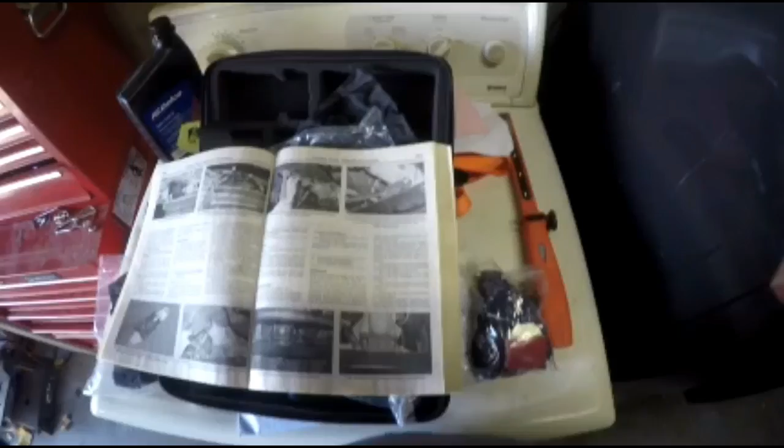This is a video of the Silverado transmission removal, and we're going to start the video. This is to remove a transmission on a 2005 Silverado, which you can actually do 2003 to 2007, depending on the 2007 model.

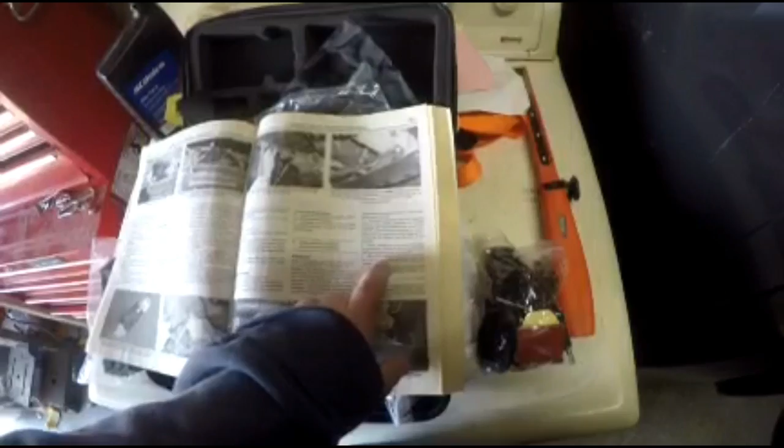Alright, so first thing it says is to disconnect the negative battery cable. And then it says to raise the vehicle and support it on jackstands. And then it says to remove the transmission oil pan plug and drain the transmission fluid. Alright, so right now we're just going to disconnect the battery.

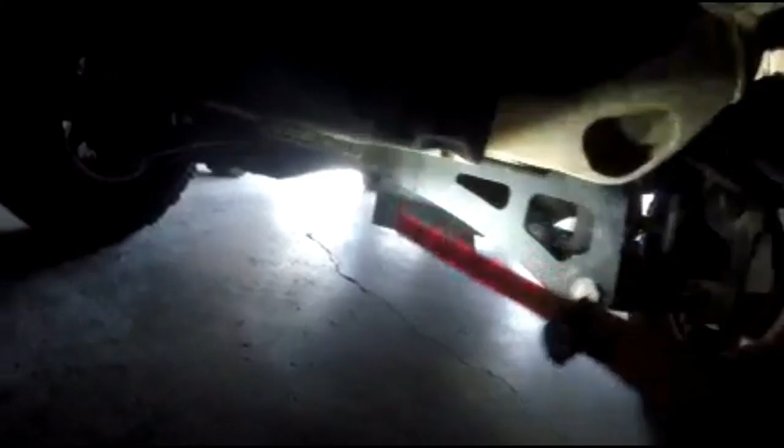Alright, so it says to raise the vehicle securely on jackstands. My truck has a 6-inch lift, so I don't need to put it on any jacks. But when you do jack it up, if you just have a regular truck, let me get a light. I'm gonna edit this anyway. So I would say jack it up right here, and then you can put your jacks on your frame back there. Okay, but like I said, I don't need to jack it up.

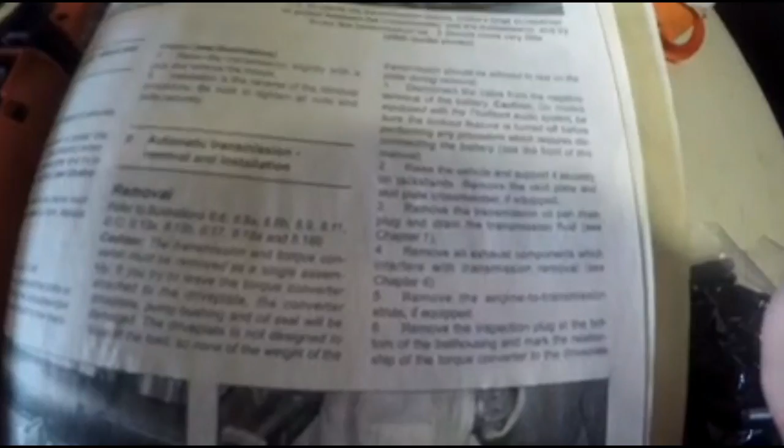So next it says to drain the transmission, which you don't need to do right now, so I'm not going to do that right now. But if your transmission doesn't have a plug for you to drain your oil, you're going to have to take all the bolts off, and that sucks because oil gets all over the place. Transmission oil freaking stinks. So you're gonna have to have a pretty big drain pan and some rags. I'm gonna do that probably towards the end, because I have the plug there, so pretty easy.

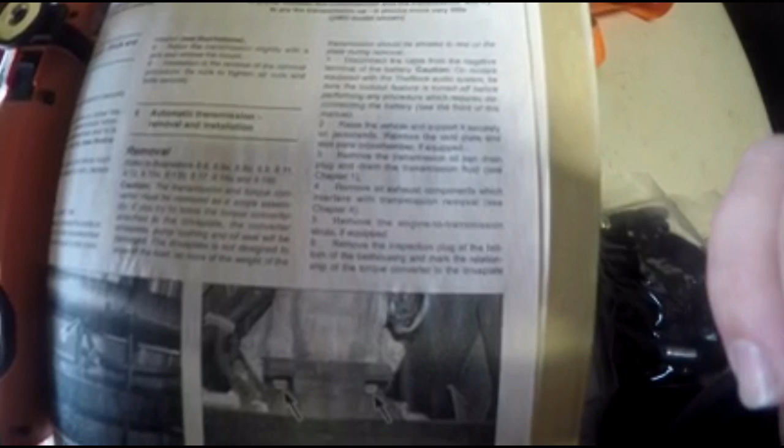Remove all exhaust components. So you're basically not taking off the header. You're taking off the Y pipe that connects to the exhaust manifold, because that's in the way of the transmission. So yep, that's what we're gonna do right now. You gotta spray the Y pipes with a rust penetrant. Where did I put it at? The WD-40. They make a good rust penetrant.

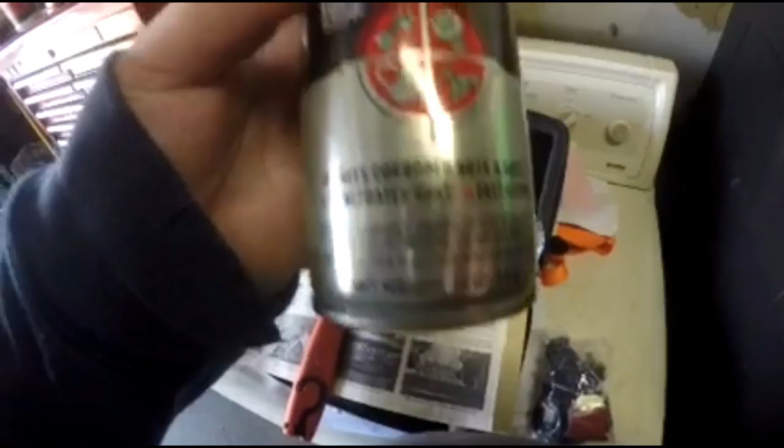So to spray the Y pipe, I'm going to use this WD-40 rust release spray. It's like $7.99 I think. But it works wonders on releasing rust. It kind of breaks down the molecular structure of rust, so it breaks off easier. If you don't have access to WD-40 rust release, you can use any type of WD-40, but it's going to take longer.

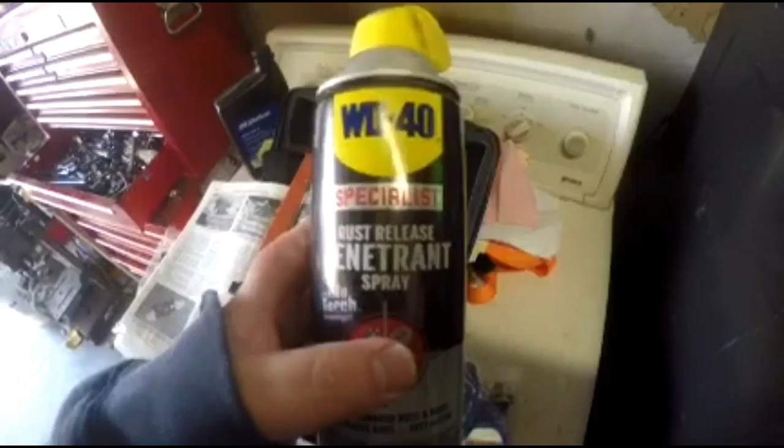I'm just going to spray it on there, let it sit for 10 minutes, and then bust them loose and see if they pop. If they don't, then I'll spray it a little bit more. It might need 20-30 minutes. But if you just use regular WD-40, I would spray it and give it a day, and keep spraying it throughout the day. Get a good soak on it. I did break an extension on my last video, so right now I'm going to go down there and spray the Y pipe bolts.

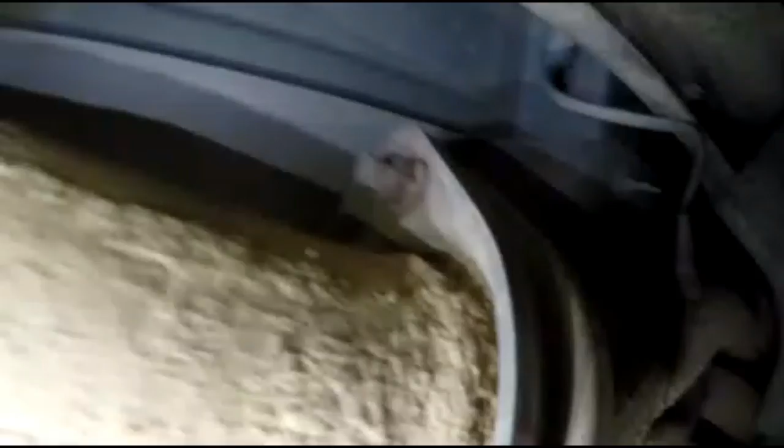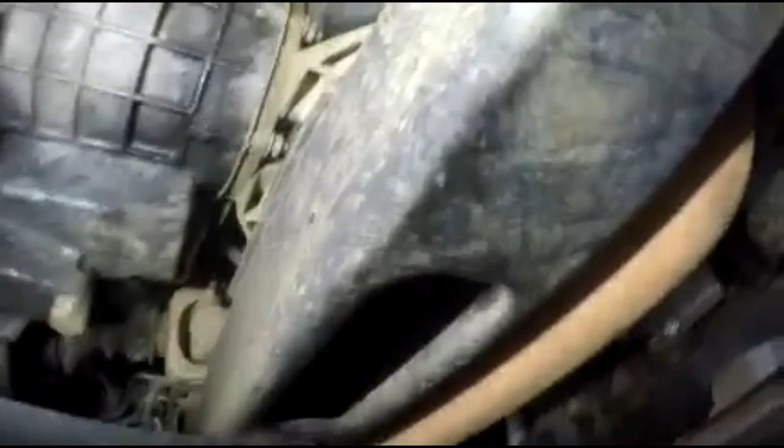Spray these too. There's just two here, but there's mud and gunk and all that stuff. Looks like I got a little rear main seal leak there. I'm gonna buy all new anyway, so fix that. This one looks like it has a lot more clearance than my other 2004 Silverado. Okay, so I'm gonna spray those, and I'll get back to you. So I sprayed it down with some WD.

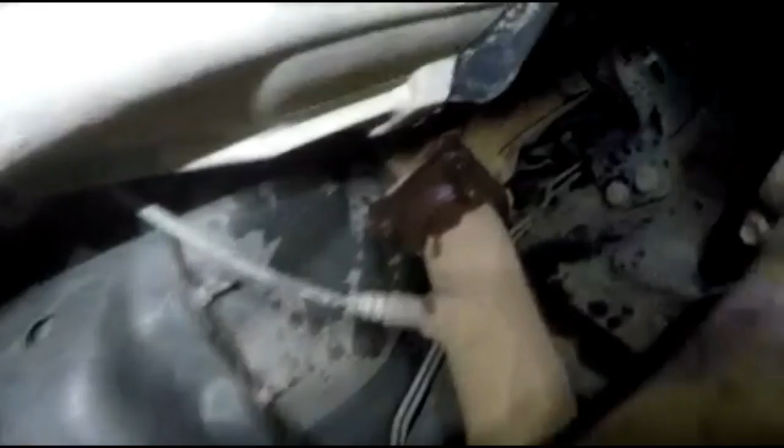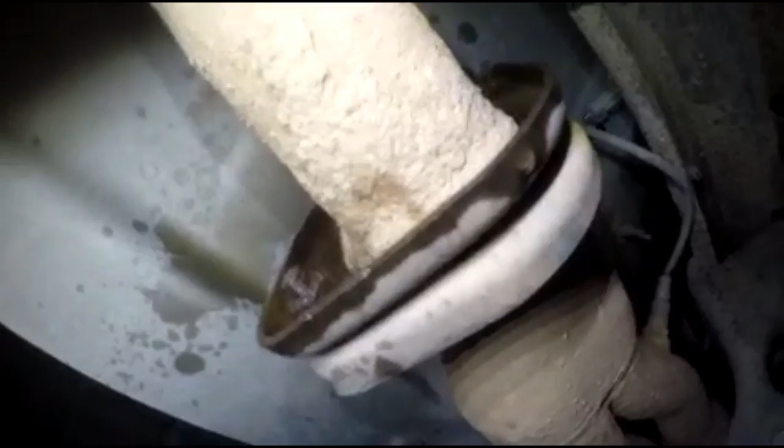They're pretty crappy towels, and then I sprayed this one here and there. So I'm just gonna let it soak up a little bit, and I might crack these ones first. It should just come off easy. I live in California, so there's not much salt on the ground, but depending, some people said, oh, I use the heat torch to torch them off there. You don't need that. You just wire brush, soak it in some WD, crank that thing off there. Should be good to go.

Alright, so I'll let that sit, and I'm gonna have to have a handy towel too for the crap that gets on the ground. My ex left that in my house, so it came in handy pretty good.

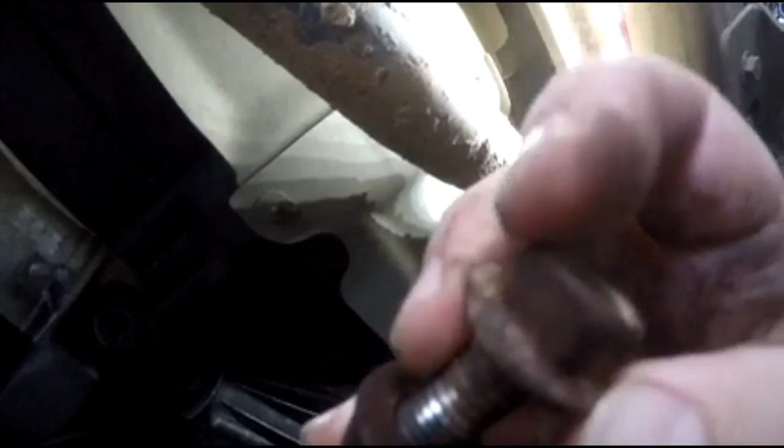Alright, so I gave it 10 minutes. It busted loose pretty easily. On the passenger side, the bolt is fixed on there, on the muffler, so it shouldn't spin. On the driver's side part, this is what it looks like. So I had to put a socket here, and I wrenched off this part, but it came off a little bit before I had to put the two sockets on there.

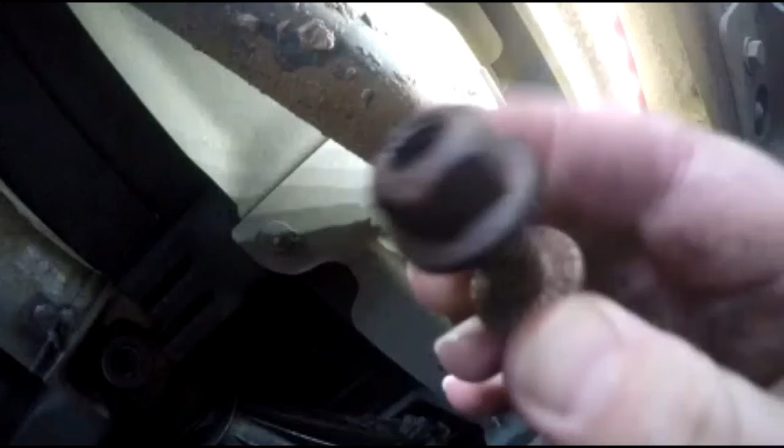Alright, so 15 millimeter, the bolt that's sticking out that way that you first see, 15 millimeter, 14 millimeter, 3/8 drive, and also on the other side it's 15 millimeter. So this one that spins, once you already break it loose, this one here is a 14 millimeter. This is on the rear part of the Y-pipe. Now I'm going to start doing the front Y-pipe on both sides.

As you can see, there's a lot of dirt here, so I'd recommend wearing some type of goggles to keep this crap out of your eye, because if you get rust in your eye, God forbid, it won't be good. I recommend wearing goggles, and I just started, so I'm not wearing gloves yet, but I do have mechanic gloves, so I'll put those on later. I don't got my goggles on, but I'm gonna put them on right now.

Okay, front pipe now. You're gonna need an extension and a swivel head, and I'll film that. I'll show you guys.

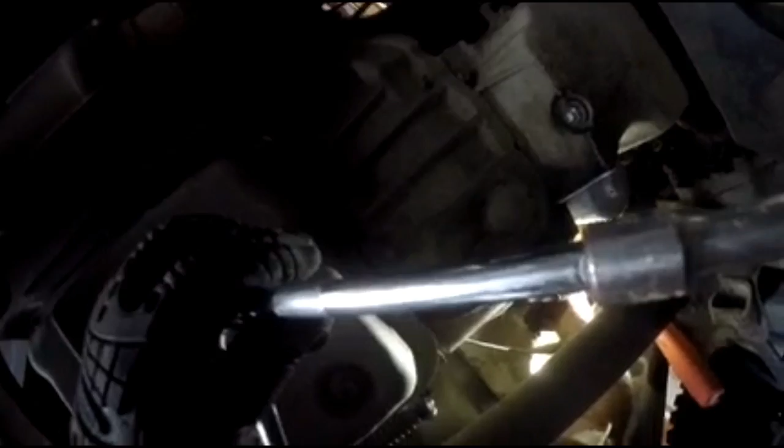I busted off the Y-pipe bolts already. This is what I use. I think that's like a foot extension right there. I got two 6-inch extensions. Might be a little bit longer, but this works pretty good. And a 15 millimeter extended socket and a swivel head, and I sprayed it with the WD-40. I let it sit for 10 minutes, and they busted loose really easily, barely any effort. It was like they were already loose. All 6 of them are loose now.

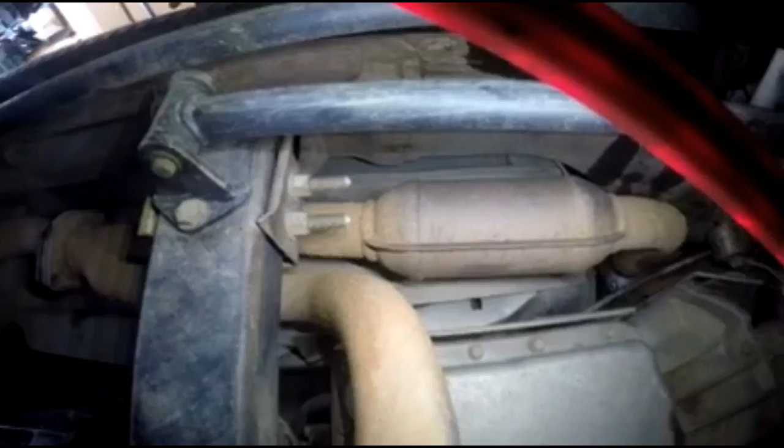So now I gotta trace back these O2 sensor wires. They should be up in the frame here. I think there's only 2 on this one. No, there's 3. Might be another one hiding somewhere. My other truck, there was 4. This one has 3. So I'm gonna find where the wires are connected to the frame back there, and as soon as I find them, I'll get it on video for you guys.

So, after you crank off your Y-pipe bolts, don't take them off all the way, just loosen them. And then you're going to have to disconnect your O2 sensor plugs. You do not have to unscrew them off of the Y-pipe, just their little connectors. I'm going to find them and then I'll get back.

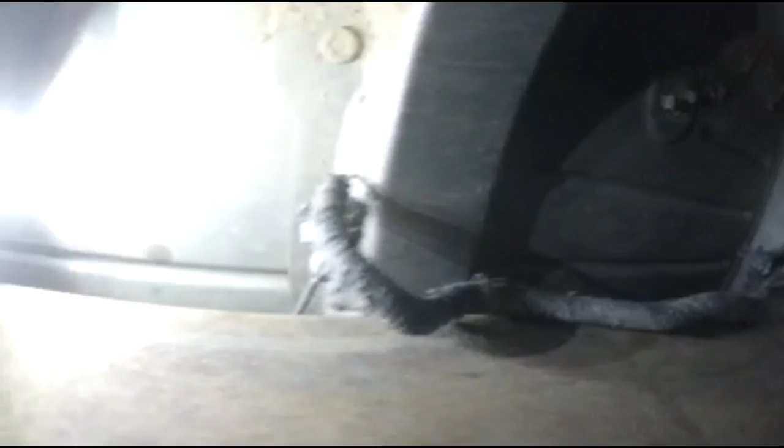Alright, so here's one of the plugs. That's what it looks like. It's just clipped onto the frame, just like there. So I'm going to try to take it off with me holding the camera. You just pull it off of the frame gently. You don't want to break anything.

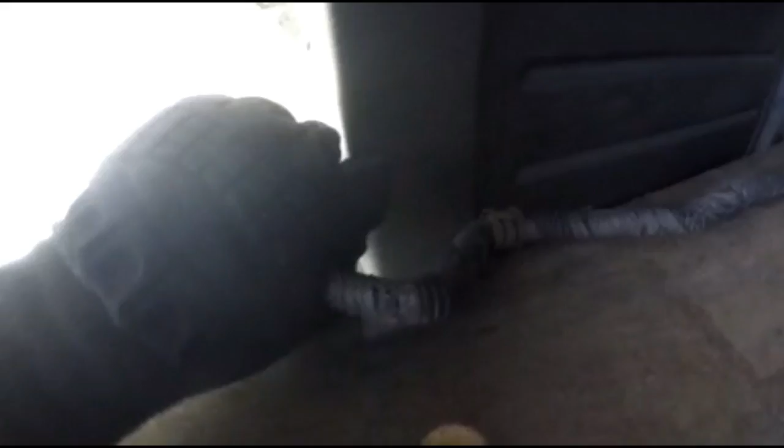Stubborn. Damn. It's really on. Alright, I'm gonna get back. I'm just gonna use my hands to take that off, but get back here. Okay, so like I said, I just pulled it off of the frame.

Alright, so next thing you do, you see this blue thing right here? Blue thing comes off there. You lift this tab up right here, tab up, and then you pull apart. That's it. Now I gotta find 2 more, and there's the other one right there. So now I just gotta find 1 more, and then I can drop it.

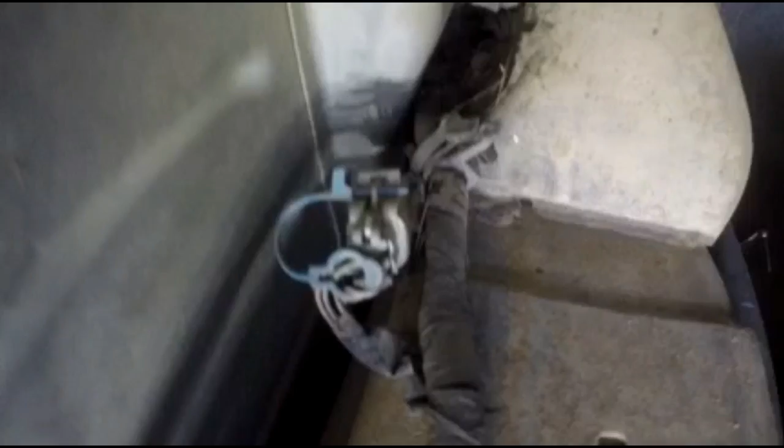The other one looks like it's up in the transmission, like on top of the transmission. So I might not be able to drop the Y-pipe, but anyways, I'll get back to you and show you where the last one is. This is on the passenger side. 1 there, 1 there, and then on the other side I gotta find out on the driver's side where it is.

Okay, so here we are now on the driver's side, towards the rear end. There is the other. So there is 4. There's 4 O2 sensors. There's the other O2 sensor there. Same thing. You just pull that little blue tab and then unsnap them. They're pretty easy to pull apart. So don't pull on the wires.

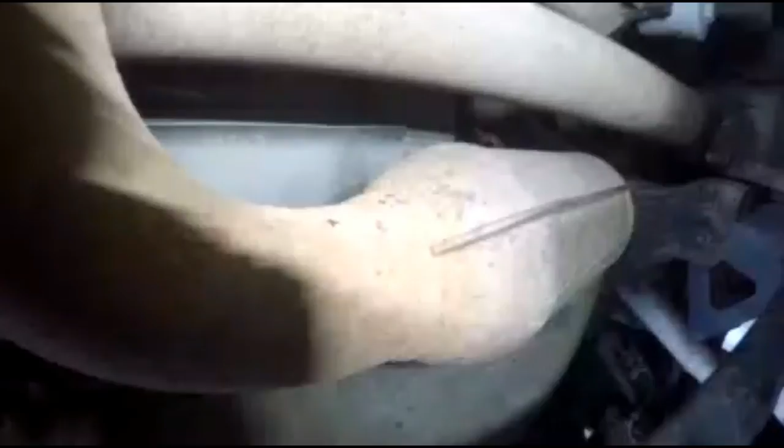And then there's the other O2 sensor there, which I don't know. The wire is going up top into the transmission up there. So this is on the driver's side. So there is 4. The reason why there's so many is because Silverado made them for the exhaust when you first start your truck up. This works for the... so when it's warming up, you're not discharging too much unburnt fuel into the atmosphere. So that's what the 4 is for.

And then the other 2 work when it's already heated up, and then the other O2 sensors start working. Alright, so I'm gonna pull out the other 2 on the driver's side now. Alright, so I found the last one. It looked like somebody worked on this prior to me getting to it because it's already disconnected. Or, the blue tab is already out of it. So it looked like it wasn't connected to something up top.

This one is the closest one to the exhaust manifold on the driver's side. I didn't pull this off already. It was already pulled off. So, but it does have a tab on there. It looked like it was connected to some part of the transmission here on the side.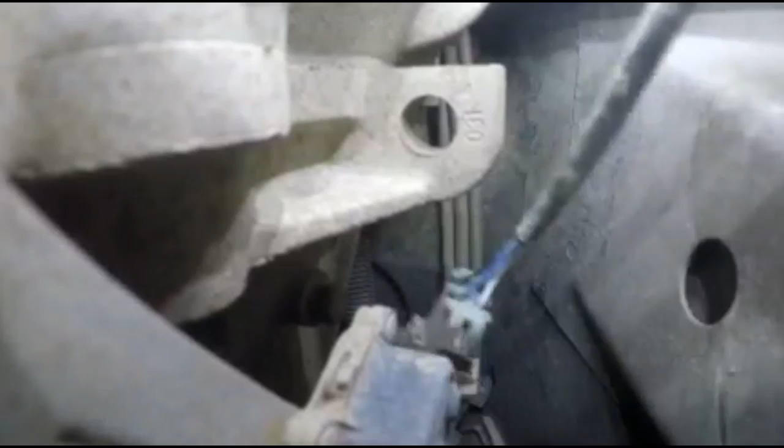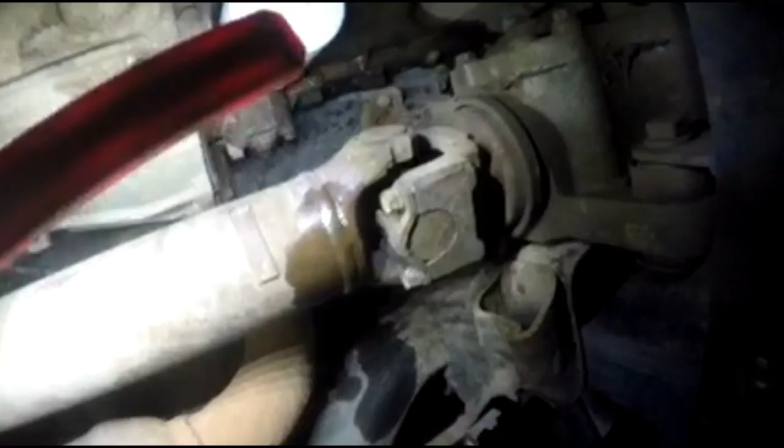So, if you are having trouble getting to this particular one here, you might end up having to skip a couple of parts and take off the four-wheel drive line here, and maybe a couple other components to actually get to it. But I'm pretty sure if you took off this drive line for the 4x4, then it should be easier to get to.

Alright, and if you are ready to take off the drive line, see, this has a plug here. That's the transmission plug. On my other truck, it didn't have one of these. I ended up having to take all of these transmission bolts off, which sucked, and crap got everywhere. It sucked so bad. And you can't get the actual pan off there because this thing is in the way. The shifter cable is in the way here, and the shifter cable bracket was in the way.

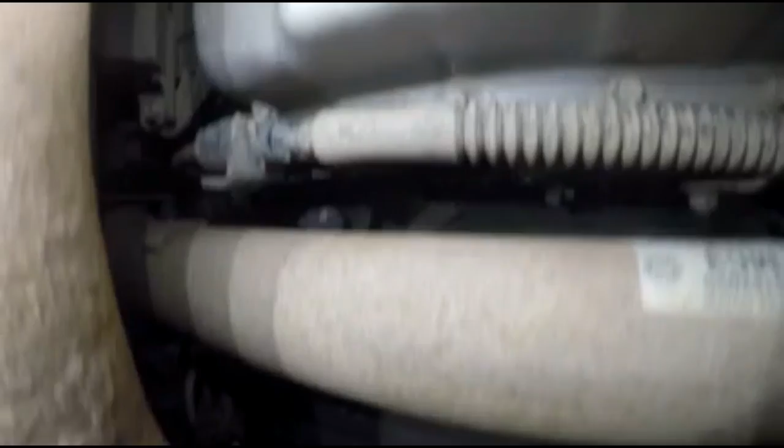So I don't even think I ever took this off because that bracket is bolted on to the top. So if you don't have one of these plugs, you're gonna have to undo all of these here and drain it that way. It's the only way to do it. Okay.

So I can unplug this now because it's already disconnected. I can get to it. Just pull the blue tab and then lift up the gray connector and pop it out of there. That's what I'm gonna do right now.

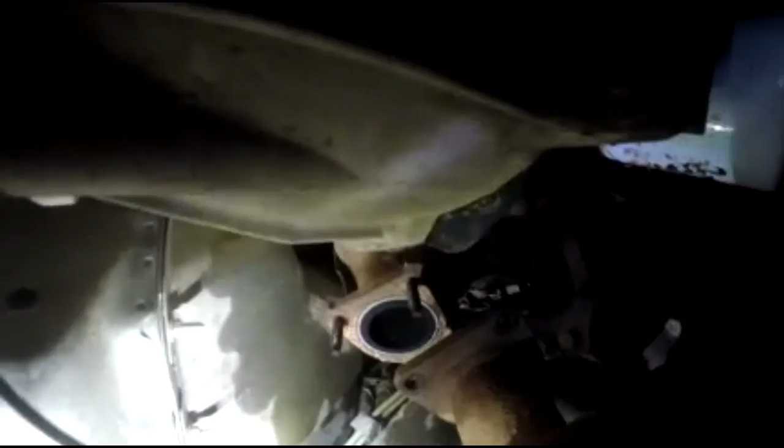The last O2 sensor was already disconnected from the fitting. It wasn't disconnected from the actual sensor, it was just the fitting. I ended up just loosening up the driver's side of the Y pipe, and I left the passenger side still bolted on there. I unbolted the driver's side and dropped the Y pipe a little bit.

Now I have full access to grabbing it, and even if it were connected onto the tab up there, you've got full clearance for your arm to get in there to disconnect the last O2 sensor. All the other ones were easy except for this one.

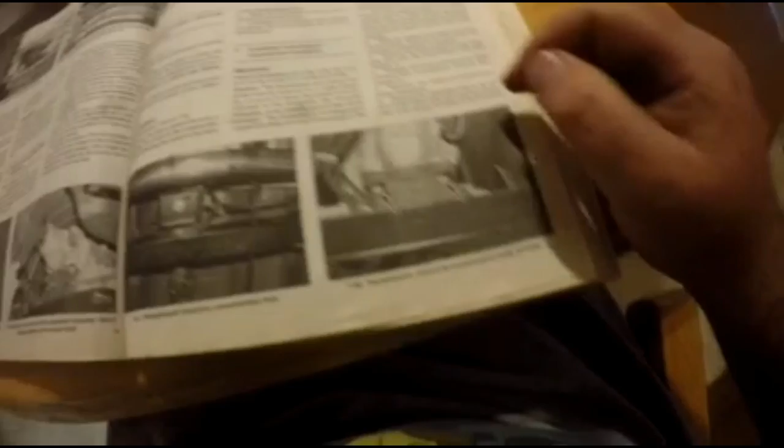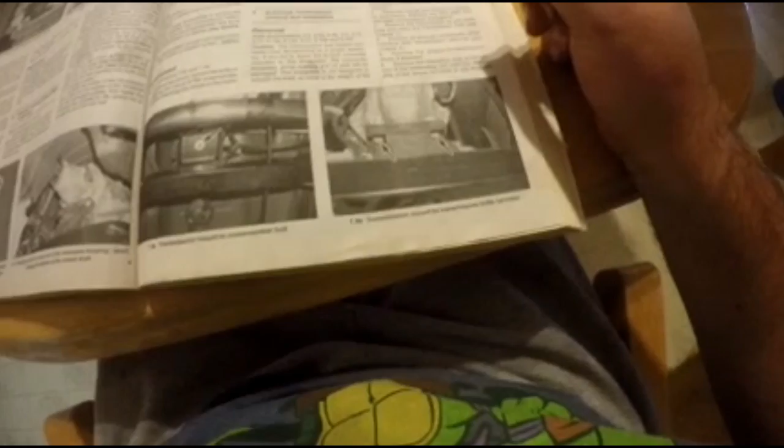Alright, so I'm taking a little break from the job right now, but after you remove the Y pipe, it's going to say to remove the transmission struts if equipped. I don't know why it wants you to remove the struts so early, so I'm just going to leave that on there until I've got my transfer case off. Maybe it's for if you have a 4x4 or not, I'm not sure, but I'm not going to remove the strut transmission mount yet.

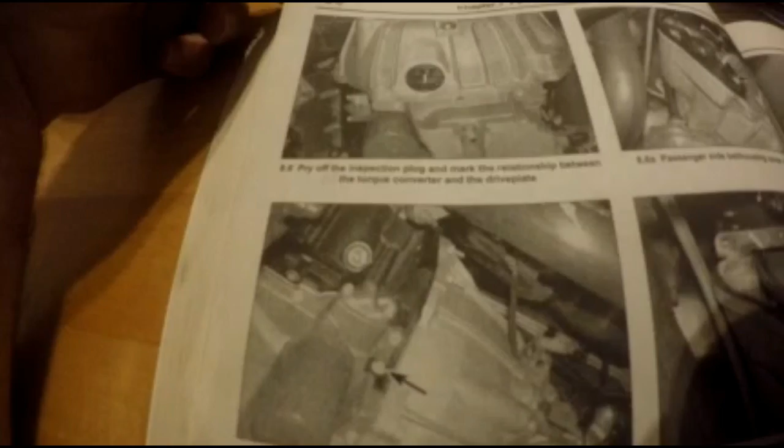So it says now to remove the inspection plug at the bottom of the bell housing and mark the relationship with the torque converter. I'm getting a new torque converter, so I'm not worried about that. But if you are putting your same torque converter on there, which I don't see why you would if your transmission's blown up. If your transmission's blown out, you're gonna have to get a new torque converter anyways, because all of the metal that broke off when the transmission broke just shot right into your torque converter. So you're gonna have to get a new one anyways.

But you just mark one of the bolt holes to the flywheel, so to the drive plate. So you just do that. I'm gonna take a little break and then I'm gonna get back at it.

I couldn't get the Y pipe out all the way because I've got a lift kit on my truck, so there's a couple of things that are stopping it. I guess I'll show it to you guys, but it should just come right out. My lift's extra added support brackets are stopping it from coming out, so I had to take a couple torsion bars out, but it still doesn't come out. So I'm gonna have to wait till I take the cross member out, and then it should come out completely. But I have enough room to do the majority of the stuff, so it should be alright.

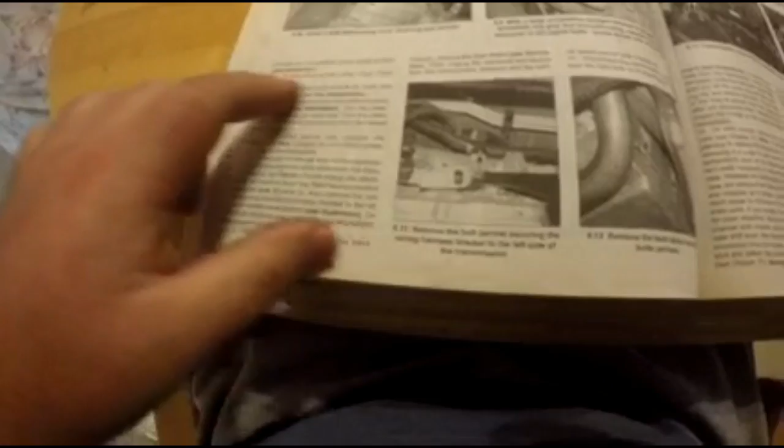So next, remove the starter, and that's what I'm going to be doing next. And don't forget your Ziploc bags. You're going to need some Ziploc baggies to mark all the parts, the nuts anyways. These are just clear ones. You can get the ones that you can actually write on, but Ziploc bags will come in handy in the end.

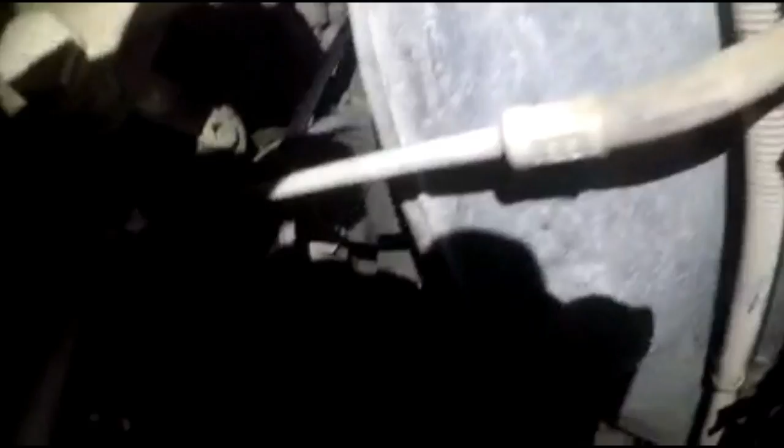Alright, now I'm taking off the torque converter. You need a 24mm socket to attach on the front crankshaft pulley bolt. A deep socket would work better, and it would also work better if you had a friend help you out. When you crank the crankshaft pulley, you want to turn it clockwise, facing the front of the truck, and you're going to have a friend help you.

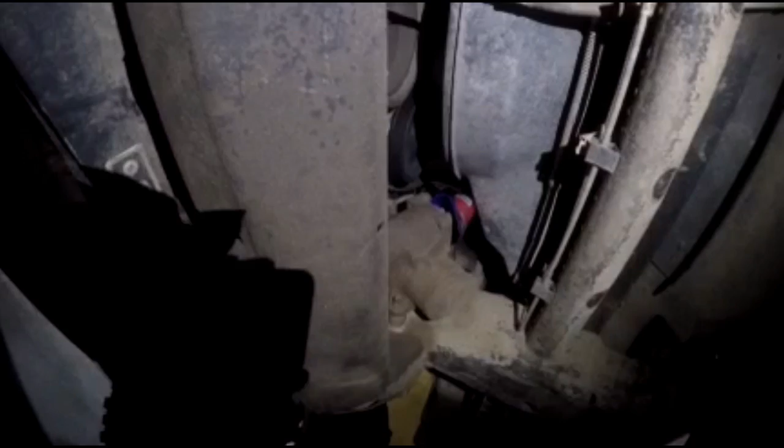He's going to have a 24mm socket on a half-inch drive, torque wrench or something, because when you're taking off the torque converter bolts back there, it's gonna want to move the crankshaft pulley, so he's gonna have to hold it tight. And I'm pretty sure there's Loctite on there from the factory, so I'm thinking somewhere around 120 pounds, possibly. So any way that he can hold it. I had a girl help me last time. Alright, gonna take that off.

I'm gonna call my friend. He's gonna help me out, and maybe I might make a video.

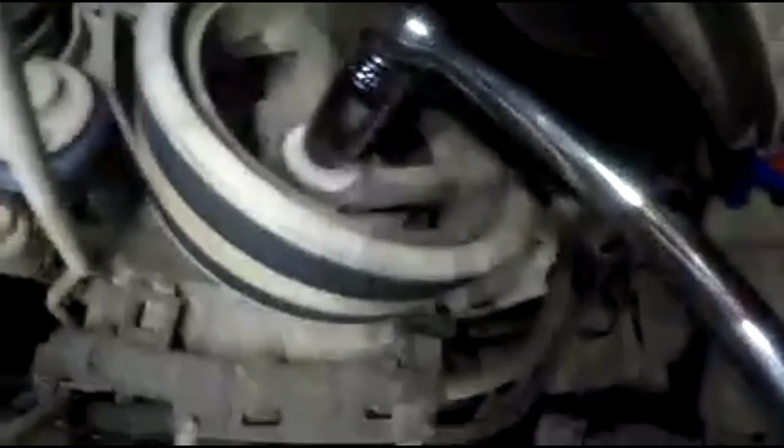So I got the good old torque wrench here that is adjustable, probably about 2 foot long. So when I'm ready to spin it, I can get the rest of those 3 bolts on here, and I believe that they are 14mm. Alright, so this is what you need: 24mm stock, unless it was already taken off before, then it's going to be 16mm. And there's the extended socket, 24mm, and the torque wrench here.

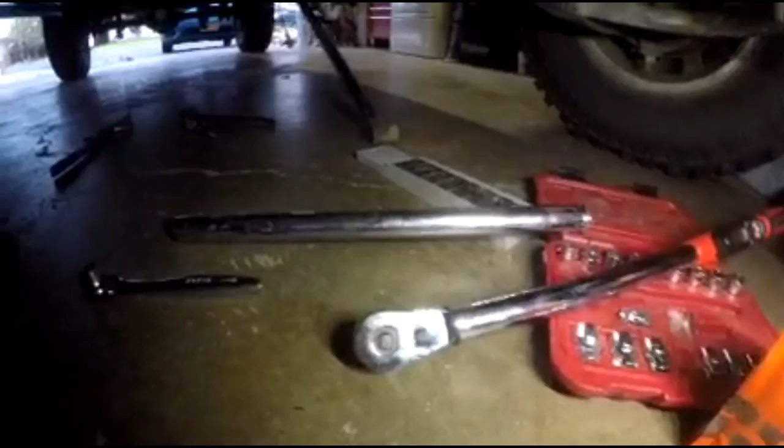All right, so now I got it in here ready. I believe it's 15mm. I'll check later. 15mm, 3/8-inch drive, torque converter bolts. There's 3 of them. It's best to have a friend to help you, so you can hold the crank and spin it when you need it.

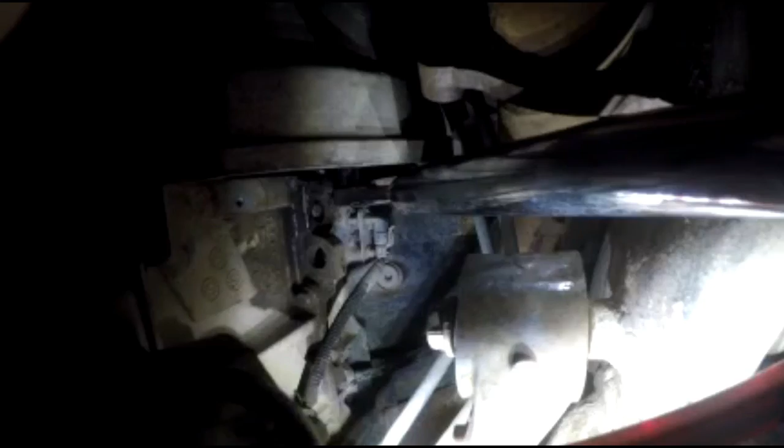Okay. So this is what I got going on here. I got about a 2 foot torque bar connected on my 3/8 drive on a 15 millimeter socket to get that torque converter bolt off back there. And then I got my friend holding on the 24 millimeter crankshaft bolt to keep it from spinning while I crack this loose. And we got a whole pile of Reese's peanut butter cups here.

Alright, hello YouTubers! So I removed the torque converter here, and now it's saying that I gotta mark the yokes to remove the drive shaft, because they're all balanced, so you gotta make sure you mark them. I got some white out here that I'm gonna mark all the yokes with and make sure all the U-joints go back to where they were. I'm gonna check them, might get some new ones.

But still you gotta mark the drive shaft, the U-joints, and then on the transmission you gotta mark that too for the yoke. So the whole thing needs to be marked. Unless you're getting new U-joints, then you don't have to mark the U-joints, but you do have to mark the drive line to the transfer case and to the transmission.

What's up, YouTubers? Alright, so white out. Okay, now you gotta mark the yoke from here to your U-joint down to here. Pretty easy, pretty simple. Just make sure you mark it like that so you know how it goes back on, because it's all balanced. You gotta mark this one. Just mark all of the connections before you take them off.

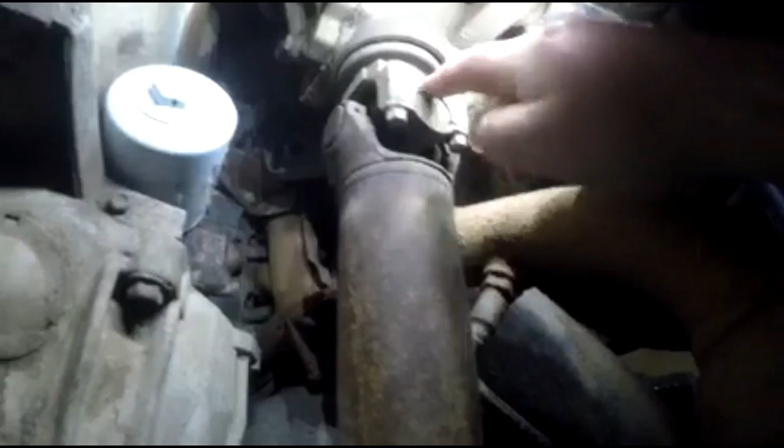After you take them off, you want to check your U-joints. Make sure that they're solid. Since you're going this far, I think these are only like 15 bucks a piece. There's 4 of them, I believe, and just replace them all. Since you're gonna take these off anyway, might as well replace those. And after this, a couple of connections and so on and so forth.

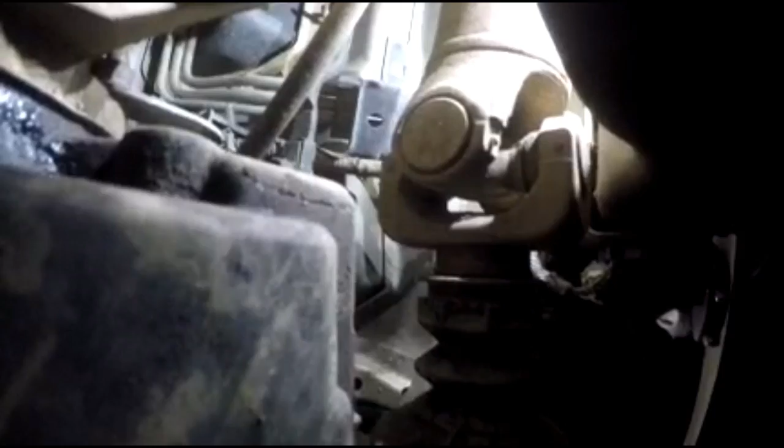Alright, so this is the second location, to the transfer case. Okay. So mark this yoke, just like I did that one. See how it's marked? Alright, you're going to mark this one also to the end of the transfer case here. Alright, so this is the 4x4 part. And then we're going to do the transfer case to the differential. Alright, so just mark this one.

That one's marked. We should be good to move on. I marked it. I mean, it's not pretty, but as long as you mark it so you know how to put it back. Okay.

Now this is the transfer case to the drive line, and then I'm going to go back there and do the rear yoke to the differential. So I'm draining my transmission now, since I'm getting close, so I'm just draining it out.

Now I am taking off the transfer case skid plate here. Next thing, so I already got my yoke, my drive shafts marked. Next thing is the drive shaft. So I'm just taking off the skid plate for the transfer case to get it out of the way so I can get access to the drive shaft. And here's your transfer case skid plate bag for your screws.

Alright, so ready to take off the drive shaft now for the transfer case of 4x4. It is an 11 millimeter socket on a 3/8 drive.

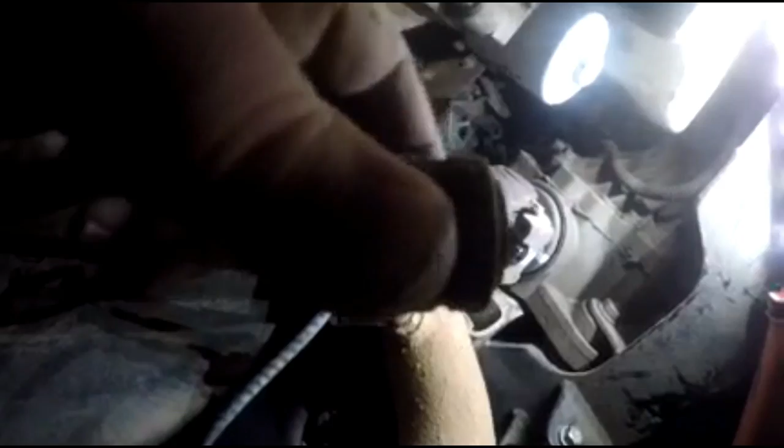What's up, YouTubers? Alright, so you're gonna have to take out the U joint to pop the drive shaft out. See, I got it right here. There's a snap ring. I used a flathead screwdriver and I just kind of pried it off, inch by inch around the circle, and it popped off.

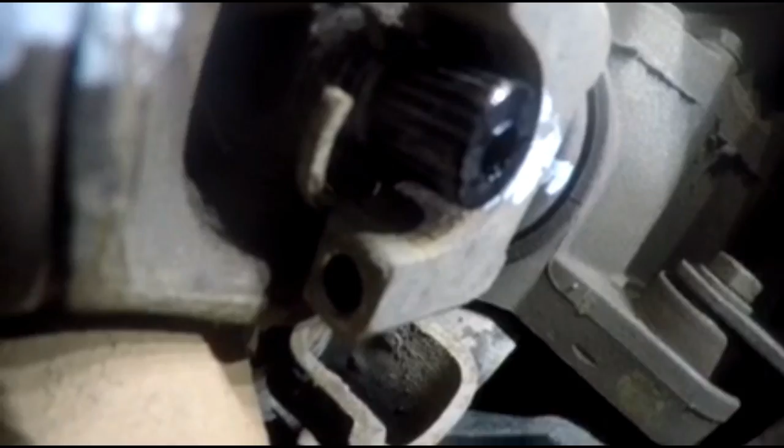Now I gotta do the simple one. No steam, no rust here. I live in California, so there's not too much rust here. So if you live back east or something, I don't know how rusty it's gonna be. But hit it with the WD-40 and let it soak on there. It should pop off.

Alright, so what's up here? So after you snap out the first snap ring, the drive shaft, you shove it back in, and you should be able to take off the other U-joint. So both U-joints are off. You pull the drive shaft back, and you should be able to wiggle it out of there. And then after that, you should pull it off of the transfer case.

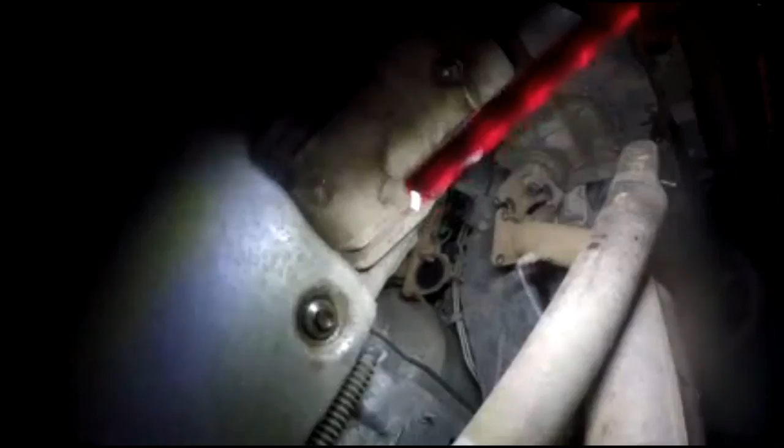So there's the drive shaft, got disconnected. And now I just pull it straight off of the transfer case. Nothing should leak out. Alright.

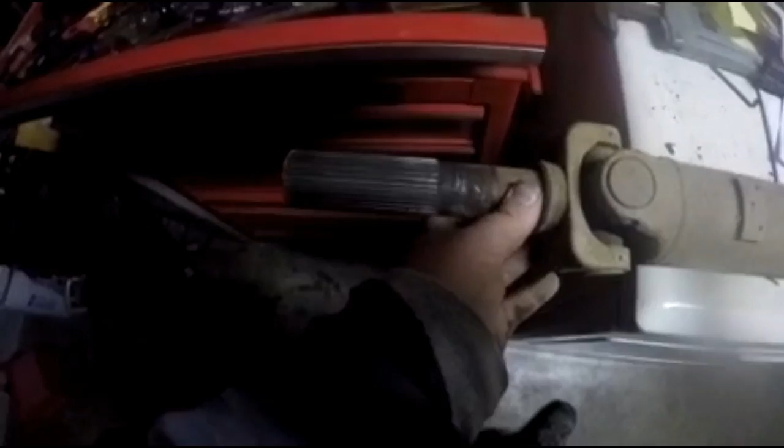Alright, what's up? So what I did was, I just unsnapped the one C-ring that was on there on just one side of the U-joint. So just one had to come out, and then I lifted it up that way since I had all that clearance, and the other one I was able to just slide out. And here you just slide it off of the transfer case, smoothly off the splines, and it came right out.

So now I gotta do the transfer case to the axle. Alright, so on the rear of the truck where the drive line is, there's still 11mm bolts, but you cannot fit a socket in there. So you're gonna have to use a wrench to get to it.

Alright, and I just like that and unscrew them. Now the transmission is in park, so the drive line's not gonna move. So you're just gonna have to wiggle your way around it and do the other side.

What's up, YouTubers? Alright, so on the rear axle, the rear drive line to the axle back there. See the axle? That's the axle. Now all you gotta do is just take off those bolts, and once you get them out, all you gotta do is pull towards the front of the engine. You don't have to take any snap rings off. It pushes the yoke back into the transfer case, and the drive line will just pop right out.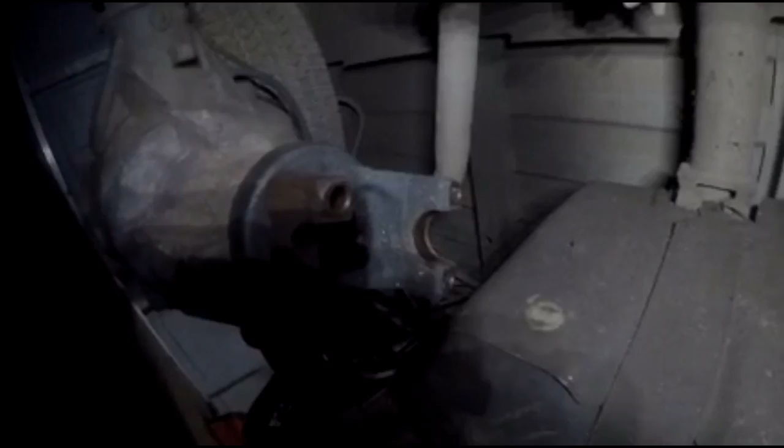Alright, so now we got the drive shaft out of there. So now working on the left side of the transmission, disconnect the shift cable from the transmission.

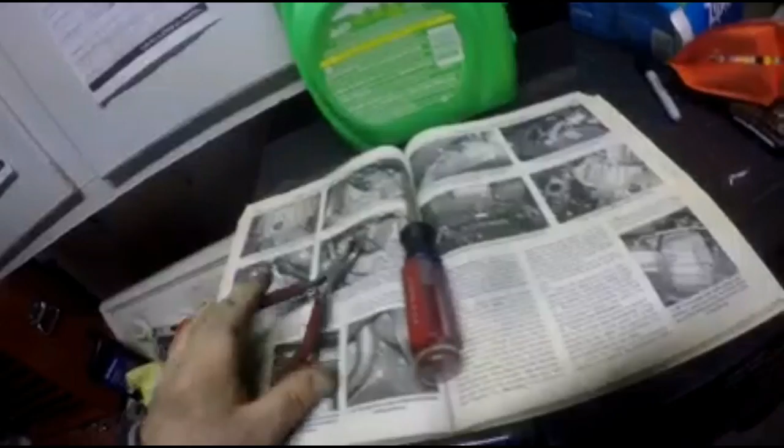Now you're going to need a pair of needle nose pliers with the curved end, and a flathead screwdriver. Alright, so all you got to do is stick a screwdriver in there and take the retaining clip off. You stick it in there, you pull away, and it should just pop right off. Just like that, that's for the retaining clip. See? Pops right off.

Take off the shift cable. You just put your socket.

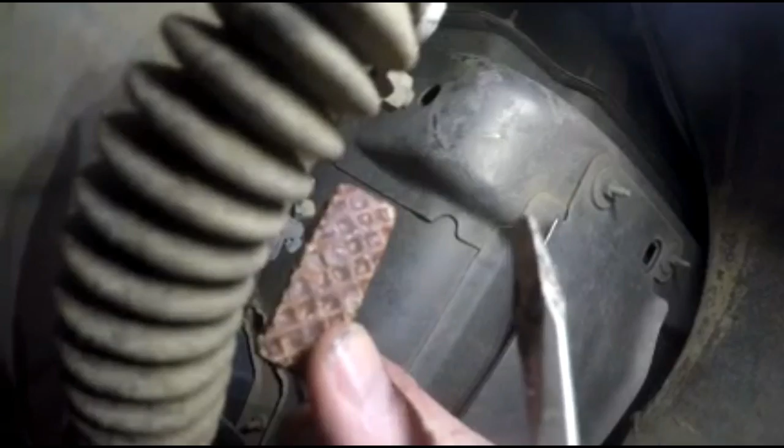Is that a Reese's there? Yeah, that looks like one of those special candies.

So it just pops right off like that. Alright, so when you pop out the shift cable, all you do is pull it out like that, and it just pops out. Nothing special there. You just pull towards the back of the truck, and it just pops right out.

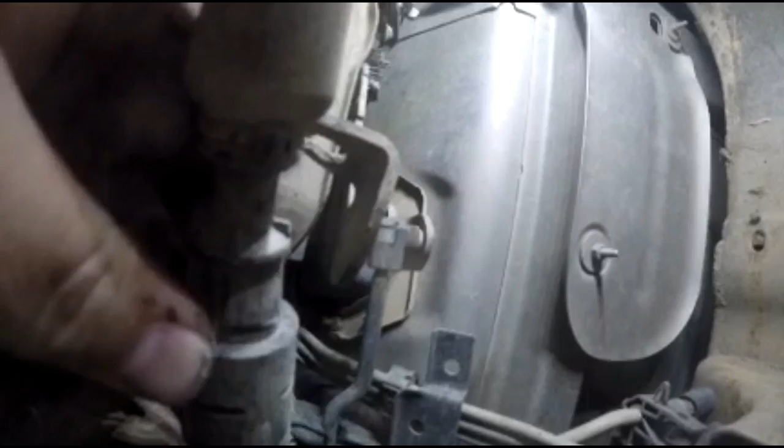See? So all I did was pull that way, and it unclips. You just pull it back that way, it unclips, and it should just come right out from that little part there. And that's it for the shift cable.

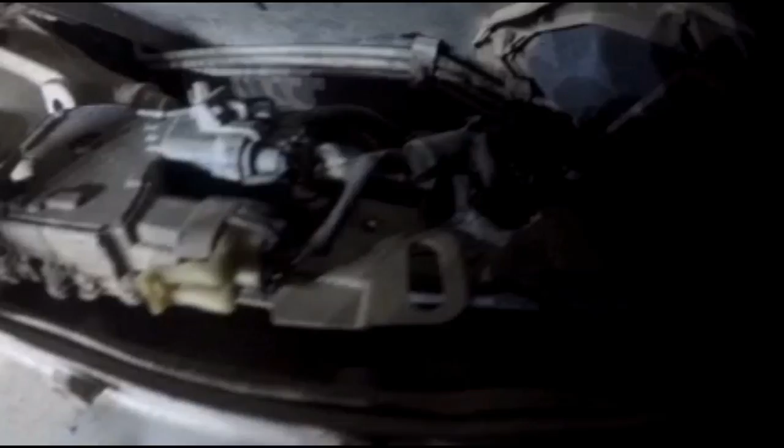Alright, so now it says to unbolt the neutral switch wire harnesses. This is 1, 2, so 1, 2, and then...

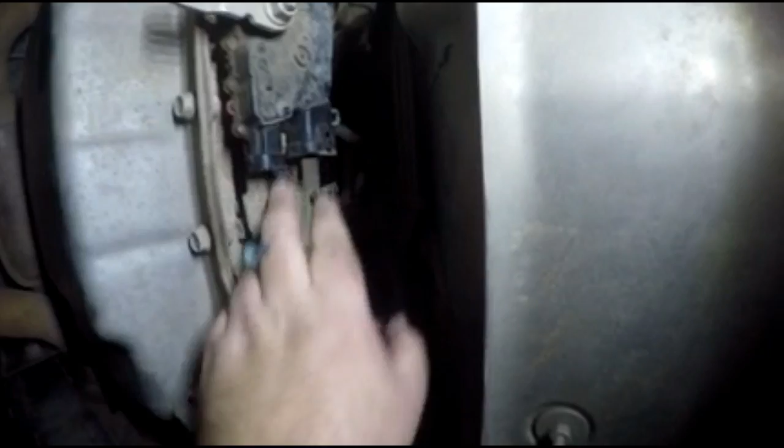What's up, YouTubers? Alright, so I unplugged the neutral safety switch wires here. This is all. So there's two that was connected to the neutral safety switch, which were connected to these two ports here. And then there's this wire harness here.

Let me get the light so I can show you guys. I'm almost done now, so I'm moving on to the last parts here. So this harness here was connected to right here, and that was a 9mm.

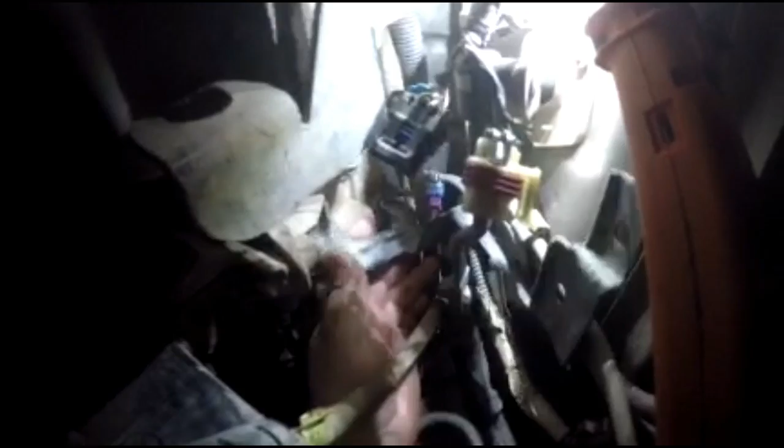And then there's one more back here towards the back. There was this connects another wire harness to the transmission. I had to unplug this thing also.

Alright, and then there was one plug up here. Not sure what that was to, but I unplugged that thing.

And right now you just want to start unplugging and unbolting the transmission and all the wires and everything. If you see a wire, unbolt it. So far I got two wires here, and two wires here. I got a bracket here, and I got a bracket there. And then I had another bracket here. These were 15mm, 2 bolts, and then one plug here.

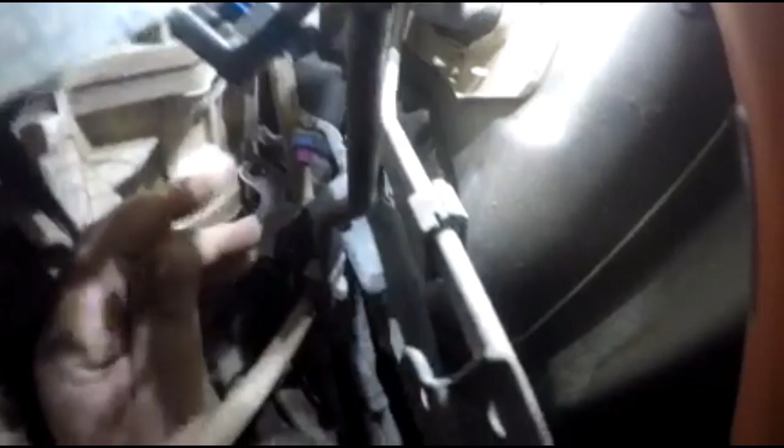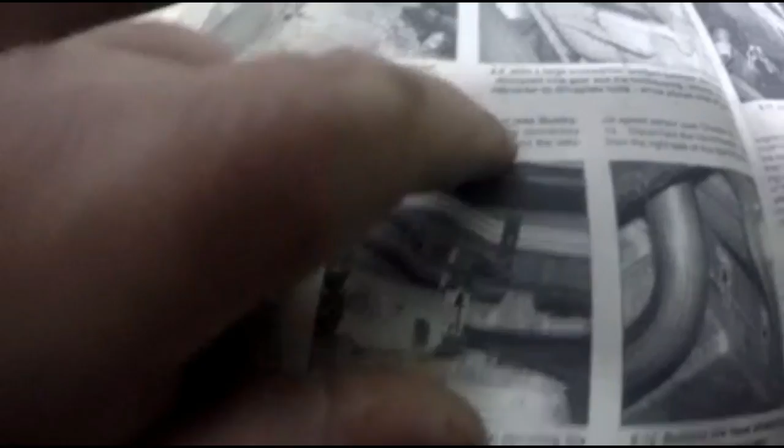Now I am going to work on the right side of the vehicle, the right side of the transmission, remove the heat shield, then unplug the electrical connectors from the transmission solenoid and the vehicle speed sensor, and then disconnect the transmission cooler lines.

Alright, the passenger side, I am working on the heat shield here. This is 10mm bolts, there's 2 of them.

What's up, YouTubers? Alright, so on this one I got a manual shift lever on the transfer case. All they did was stick a small flathead in there, and it came off of the shift lever on the nipple. See that nipple? That's for the 4x4.

That is my 3/8 socket up there on the very top part of the transfer case. So I just got a 3/8 ratchet on a 15mm short socket. So that's it right there. You don't have to. That works for me.

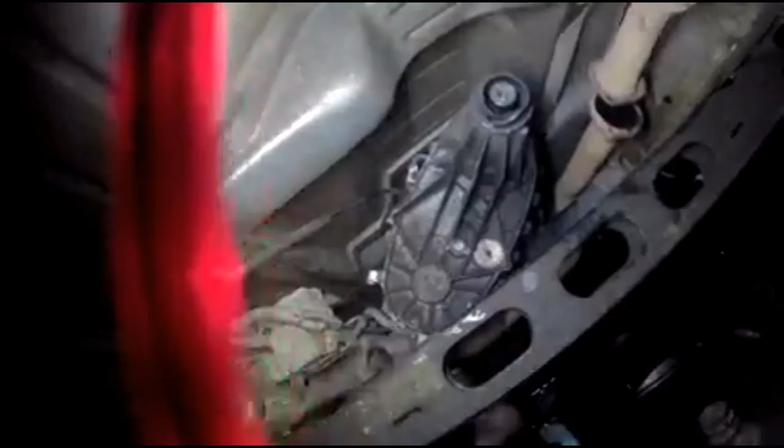What's up, tubers? Alright, I'm gonna drop this transfer case. I got a transmission jack here. Now I believe I unhooked all the cables for the transfer case, so I'm just gonna lower it just a little bit to make sure that there's no extra wires anywhere. Just gonna do it nice and slow.

I undid all the bolts. I got one bolt on there for security. I'm gonna jack up the transmission jack, loosen the bolt that I already have on there, and we're gonna lower this puppy down.

Alright, so our transfer case is out from the connection, and we're dropping it now. Tubers. Alright, so now I'm just down to the cross member bolts. There's 2 bolts here for the cross member, and there are 2 bolts there for the other side of the cross member.

What's up, tubes? I got the transmission jack under the transmission. I got the bolts ready to come out of the cross member. Got 1 safety bolt, and I got another safety bolt. My truck...

So I supported the transmission on the trans jack, and we're ready to take the cross member out. All I gotta do is take that bolt out and take this bolt out, and this thing should drop straight down.

What's up, YouTubers? So right now we're just working on the bell housing bolts here. I got two here.

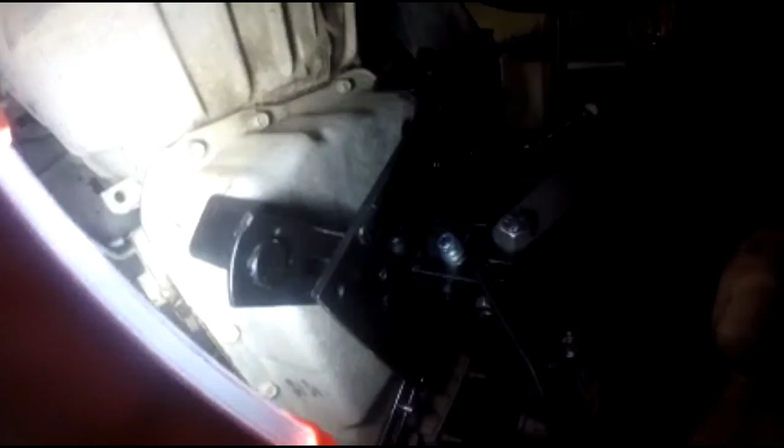Do the top part, you're gonna lower it all the way down. You're not gonna, you're gonna use that for a little bit of brace, but you're gonna lower it all the way down. You're gonna have a 2-foot extension, 16 millimeters for all these bolts, 14 millimeters for the oil dipstick.

Okay, and you're just gonna lower the transmission all the way down, and then you're gonna get your 2 top bolts off of there, and that's it. You got the tranny out. Yes, sir.